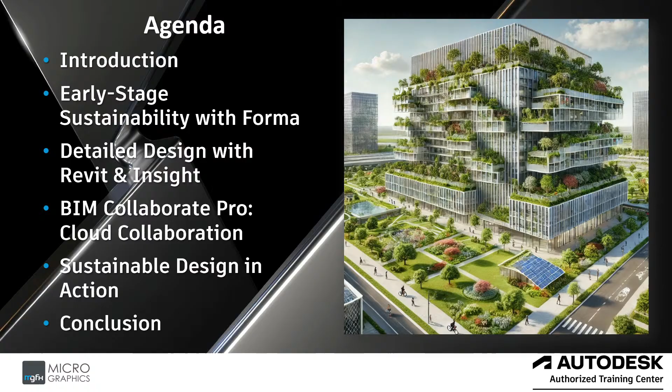On the introduction, whether you're an architect, BIM coordinator, or sustainability consultant, we all feel the pressure of tighter timelines, stricter sustainability targets, and complex multidisciplinary teams. In this session, we'll explore how the Autodesk AEC collection empowers smarter design through real-time collaboration, early insights, and powerful analytics, all within one ecosystem.

So the world is changing, right? Let's face the facts. The days of sketching by hand, communicating via emails and in-person meetings, printing documentation, making hand sketch corrections are all in the past. With rapid urbanization, climate urgency, and growing client expectations demanding a new approach to design, how do we keep up with this? We need smarter and faster and greener designs.

Today's architectural projects must be efficient, environmentally friendly or responsible, and highly collaborative. Teams need alignment. We have disconnected workflows, hand sketches being scanned and emailed or sent by post, and this is all within siloed data. Printing papers increases the risk of delays, errors, and sustainability blind spots.

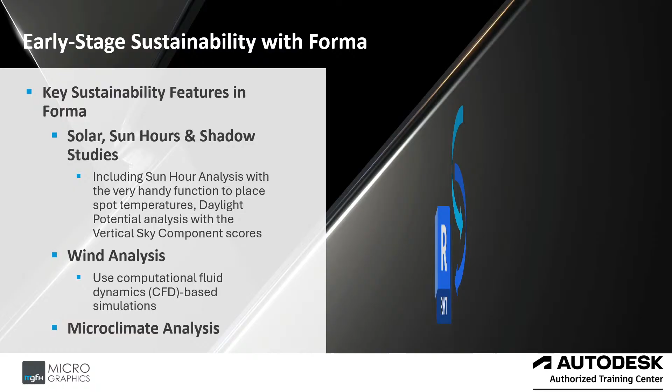Sustainability and environmental analysis with Forma. The key sustainability features in Forma would include solar, sun hours, and shadow studies. Looking at the sun hour analysis, for example, with the very handy function to place spot temperatures. Daylight potential analysis with the vertical sky component scores, giving insight to how much sunlight reaches the facades from the sky, and shadow studies. An all-encompassing solar study can be generated to optimize your building's orientation, and identify optimal facade designs for natural lighting and energy efficiency.

The wind analysis uses computational fluid dynamics, CFD, based simulations to study wind behavior around buildings. Optimize the site and massing to improve ventilation and reduce wind turbulence. Assess the effects of wind on the site. View the impact at certain heights and angles or by importance. With additional statistics, you can view the ground and or roof conditions for comfort level and the wind direction in height or with importance to the structure and the surrounding area. This is an invaluable tool to optimize sustainable and environmentally friendly designs.

The microclimate analysis in Autodesk Forma enables designers and planners to evaluate the thermal comfort of outdoor spaces early in the design process.

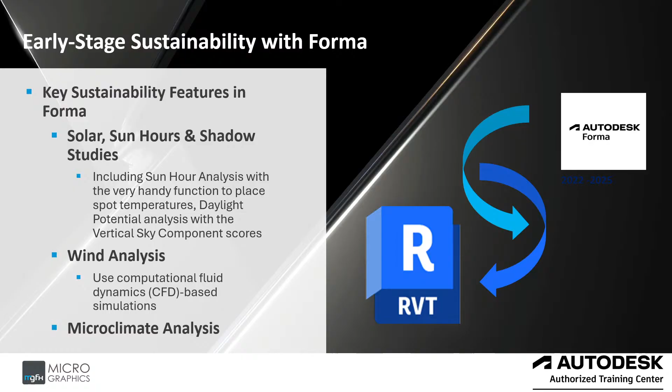Taking a look at sun hours, this is how one would run this analysis within Forma. Select your dates by month and day, allowing you to look throughout the year at the sun hours and the effects of the sun on your facades, roof, and ground conditions. We'd run an analysis.

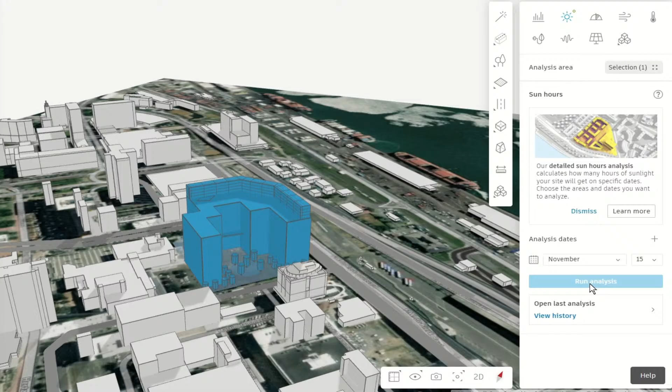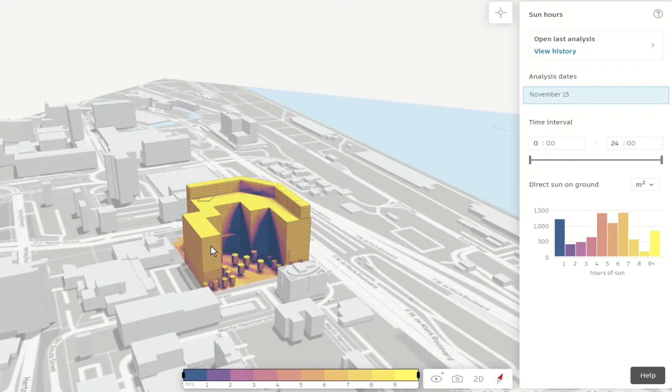Okay, let's see what the results are. This is within Cape Town. We chose a specific day, and then you have a time interval that you can select, from what time to what time, and then the direct sun on ground in meters squared. You can inspect how many hours of sun you get at specific areas within your building or around your building.

Then we have the handy inspect tool, which gives you the opportunity to see how many hours there are based on specific points on your building.

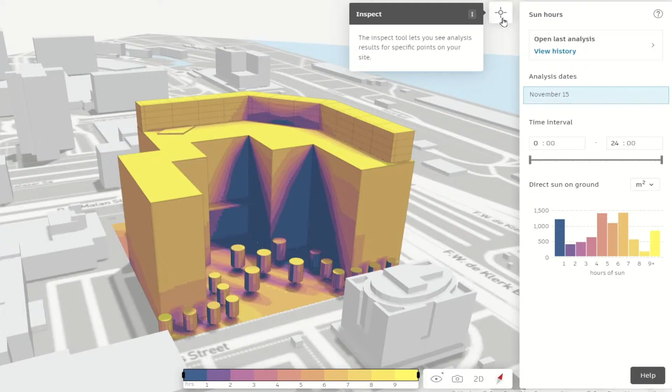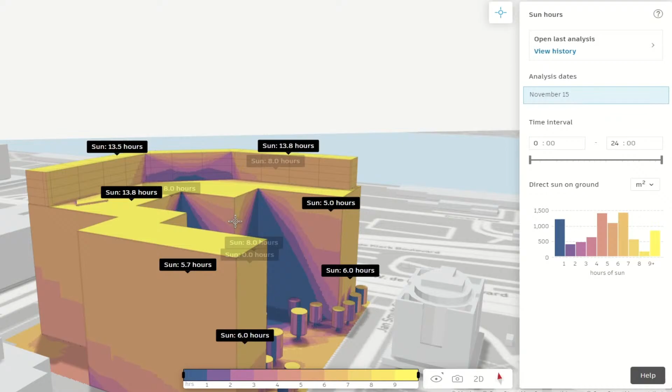Seeing that there are certain areas that get no sunlight during specific times of the day, one could make design iterations to allow for natural sunlight, reducing the need for artificial lighting, considering that there are indoor spaces that need to be well lit.

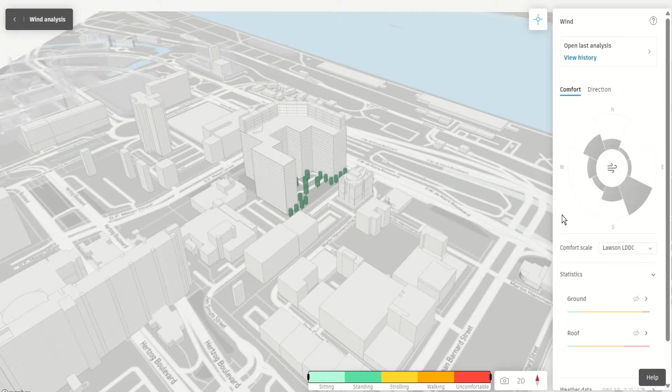Then we have our wind analysis. You have your comfort levels and the direction that the wind comes from, with different comfort scales, as well as your ground temperatures and your roof temperatures.

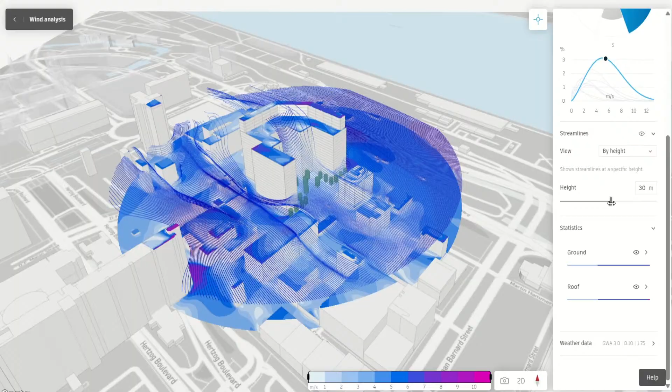Considering a southeast wind, which is quite common in the Western Cape, especially Cape Town, you can view it by height, by importance, or by variation, and see how it would impact the different levels of your structure and what kind of wind strength one can expect. This is based on local weather data from Cape Town.

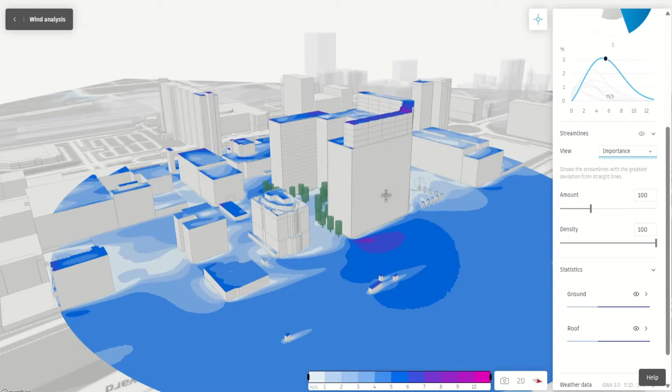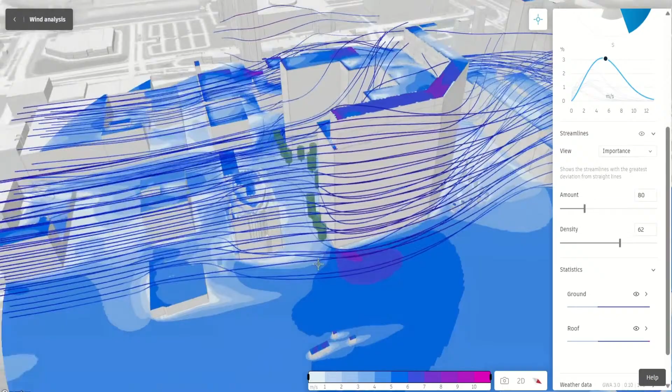That's for visual effect, so you can see the impact visually. This can be shared with all team members via your Autodesk Construction Cloud, or you can export the data and share it with them as a CSV file.

Then we have the microclimate analysis. Overall, this helps you design more comfortable, sustainable, and climate-resilient urban environments with data-driven insights into thermal performance. The microclimate is a combination of air temperature, sun hours, and wind.

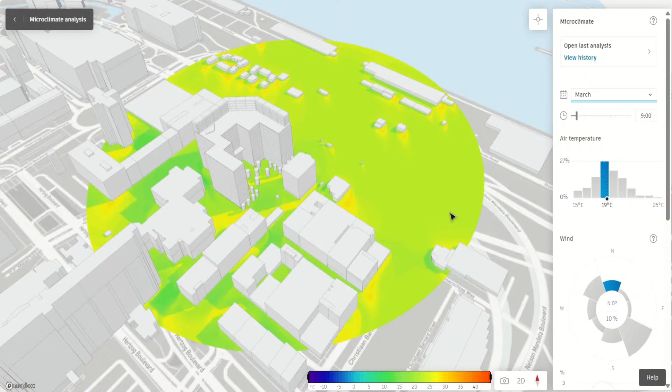Choose the time of day and month, and see the interaction surrounding your structure, understanding what the comfort levels are. You can view all the statistics and also confirm the Copernicus ERA5 data source where the information comes from regarding your site.

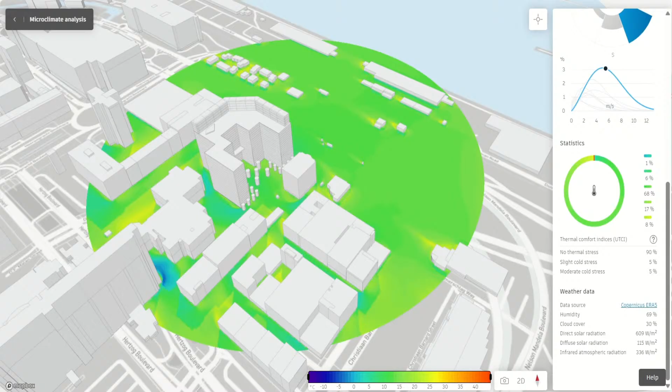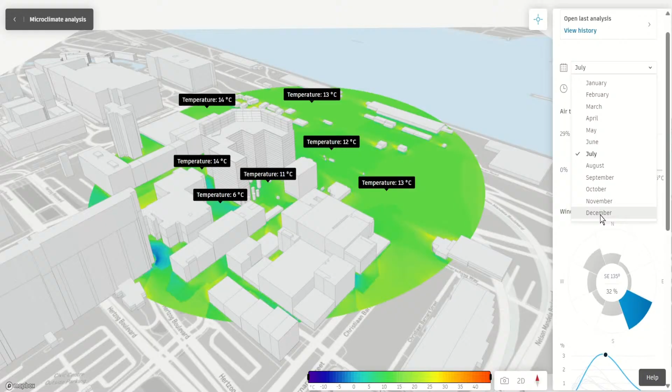You can use the handy inspect tool to get a clear indication of what temperatures would be like, this would be in winter in Cape Town, maybe mid-summer. It would be a good idea to also know what kind of temperatures to expect, and how much mechanical ventilation, air conditioning, and ductwork will be required for comfortable, livable conditions.

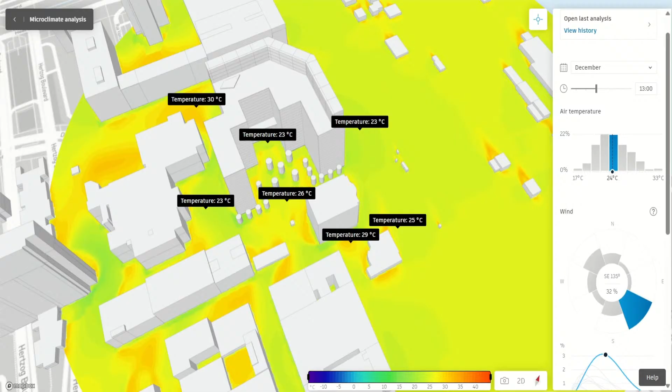So why start in Forma before designing? Understand the site first: analyze the wind, the sun, the shadows, and the microclimate before sketching a design. Smarter orientation and placement shapes your building to maximize comfort and livability. Informed decisions early let you compare scenarios and avoid costly rework later. From vision to viability, early insights guide sustainable, people-centered design.

As an overview of Forma, you can create your own site, and there's a board where you can compare things and collaboratively work with others. It's a whiteboard space.

Here is your projects, the homepage of Forma, the hubs that you've joined, companies that you work with, and your designs that have been created, your proposals. With Forma you have your site to design, and the board where everybody can talk and share information and insights, and compare your different analyses.

Here you can add your members and see who is part of this project. There are all the different types of analyses one could do, from noise to solar to embodied carbon to shadow studies. You can also add additional extensions for more analysis types. I, for example, have a parking calculator to create parking areas, aerial map information, and more site-driven information.

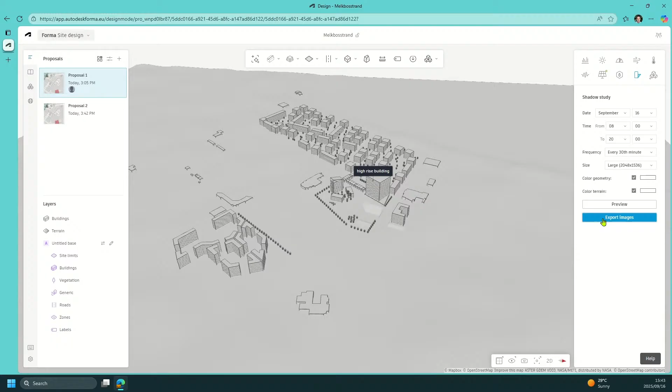Embodied carbon, and also you can go learn more about the embodied carbon if this is something that you would like to analyze additionally. You can decide what within the model you would like to analyze with regards to the envelope of the structure, the entire structure, the structural elements, interior, or the MEP systems. Then you can run an analysis with regards to the carbon footprint.

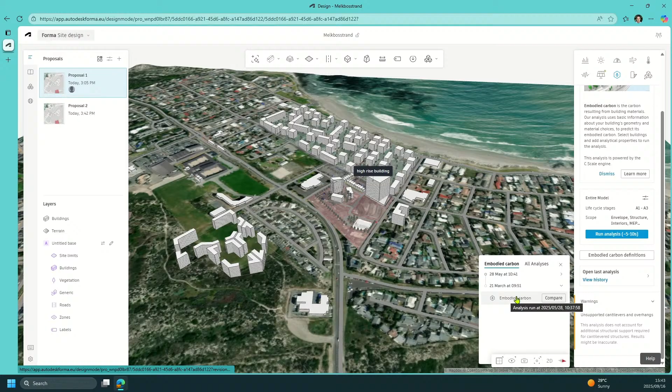So I previously ran one, so I'll compare it just to show what it looks like. On the top left, you'll see it says Forma compare. You're able to compare proposals and then different analyses with each other. You can also view them side by side.

So there, for example, we have our solar energy analysis and our carbon insights on the left. By right-clicking, you can add more views, either split the view horizontally or vertically.

So here we now have the sun, wind, microclimate, and solar energies to compare them with each other to see what the effect would be.

So that would be my Revit model that I imported, and I can see how comfortable it would be. On a certain day of the year, the 10th of September, I would have 9.5 hours of sunlight on there. I would accumulate 1,504 kilowatt hours per square meter if I had solar panels on my roof, what the wind conditions would be like, and what the temperatures would be like.

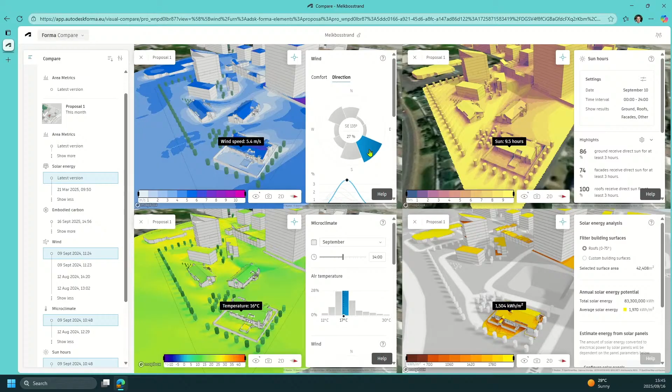Knowing what the conditions are like, you can also determine which space you would like to have where. Do you want a sunroom for the house? Do you want a braai area? You can determine what needs to be placed where for best orientation. Maybe tilting the building ever so slightly, I might get more sun hours for more solar energy for my solar panels to generate more electricity.

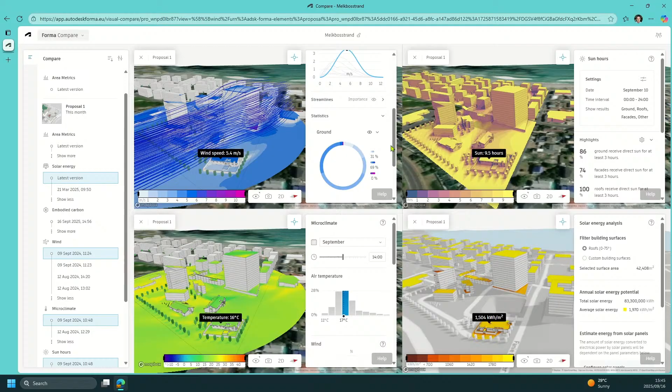Understanding the wind speeds can determine the roof pitch. So understanding your site before you start designing is ideal, knowing what the conditions are like.

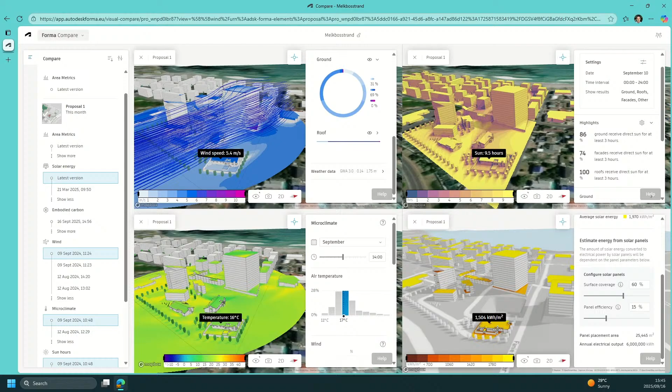So as you can see here, before I even place the first wall, you do have the option to do just a generic mass within Forma. So even if it's just a square block, or if you want it based on a house design or a commercial structure, depending on your needs, you are able to create massing elements in here.

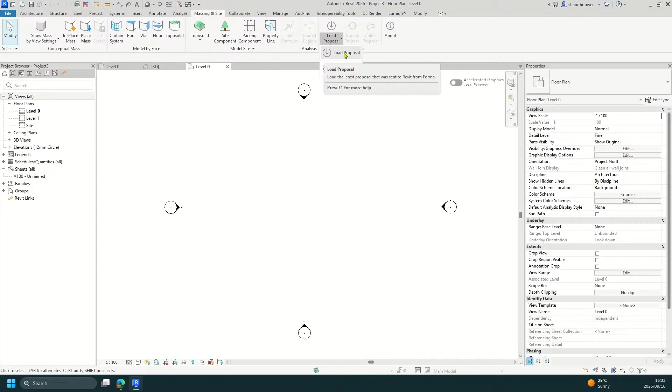And once your mass has been created, it can be sent to Revit, and within the Massing and Site tab, you will find the Forma panel where you can load the proposal, which is quite ideal if you would like to have a generic understanding of your contours of your site, how it falls, what it looks like.

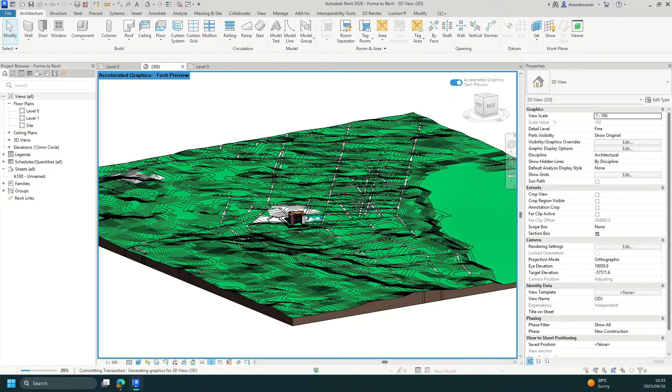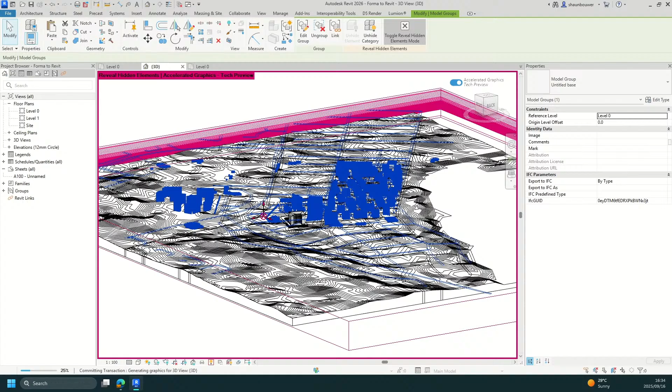Now you understand the conditions of the site with regards to all the different analyses that were run. You have your structure available. When you import the model, I've hidden all the other ones that I am not using, so the surrounding structures, but then you can start making design iterations. So the massing elements that you bring in from Forma can be converted in Revit to become walls, floors, roofs, etc.

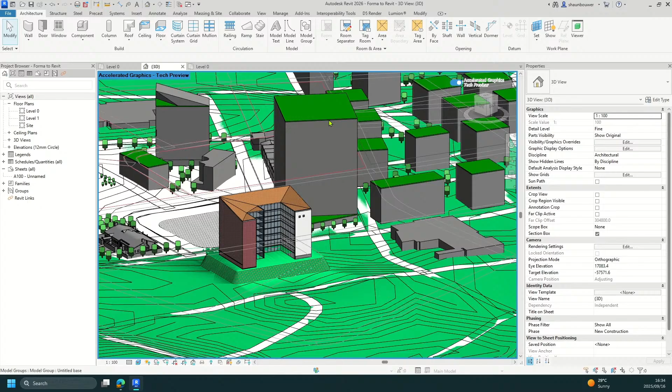So here, for example, I can convert the walls. I did this before the webinar just to show what one could do. I converted them into glazing elements, and I tilted the pitch of the roof.

Once you've done your design iteration, send it back to Forma, rerun the analyses, and see if your design iteration made a difference with regards to all the different analyses that are available.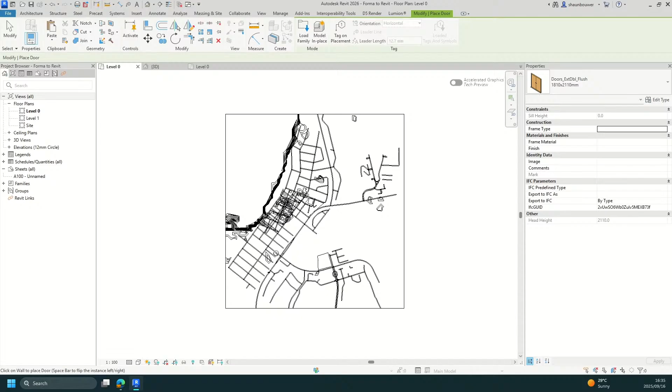So I've hidden the level lines, but there are levels that are created and given to you within Forma. Okay, so that's my site, my topo solid. I can also go and crop just that area out if I do not need all of the other information. As you can see, it becomes a roof element, and the roof element can be altered.

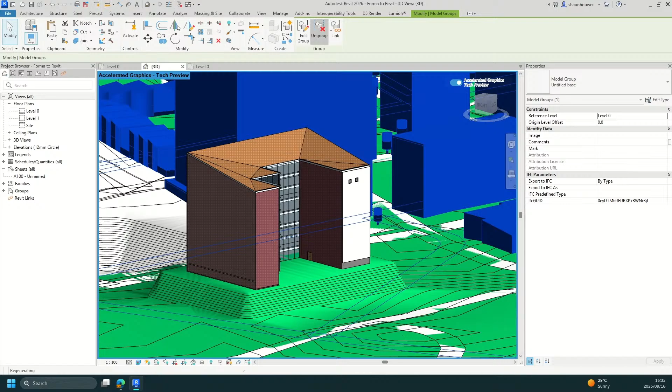So there you have it, it comes in as a wall by Forma, and you can convert that into your own elements, making it usable Revit elements.

So it's a fairly big site that I brought in, which is why my computer struggles to keep up, but it's quite ideal how quickly one could make adjustments in Forma, from Forma to Revit.

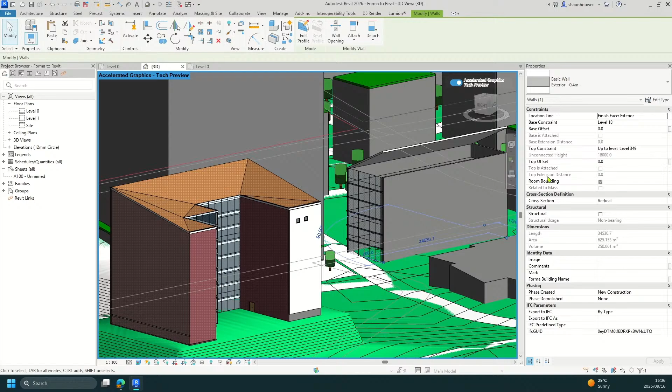Alright, so from Forma to Revit for the detailed design, including the insights, Autodesk's commitment to a sustainable future. Autodesk has made sustainability a core pillar of its mission. With every software update, they continue to enhance tools to support low carbon, energy efficient, and environmentally responsible buildings.

Revit empowers architects and engineers with a wide range of built-in and extensible analysis tools that support green and high-performance design. The built-in analyses include energy modeling, lighting and solar studies, HVAC and MEP systems, structural performance and analysis, carbon analysis, electrical load calculations, routine and space utilization, just to mention a few.

Additional extensions are available via the Autodesk App Store, and Autodesk Construction Cloud integrations expand these capabilities even further, allowing for a deeper lifecycle assessment, advanced simulation, and carbon tracking. Together with the cloud collaboration and AI-driven design optimization, Autodesk Revit helps project teams align with global sustainability goals, reducing both operational and embodied carbon while designing for a net zero future.

So, detailed design in Revit. When most people think of Autodesk Revit, they immediately connect it with 3D modeling, coordination, and building information modeling, BIM. While those are its core strengths, Revit is also a robust platform for producing detailed 2D construction documentation.

Many architects and engineers assume that AutoCAD or other drafting tools are still needed for detailed drawings, but Revit offers a complete set of tools to create elevations, sections, wall details, stair details, floor assemblies, and more, all within a coordinated BIM environment. So we will look at the different types of views that are available in Revit, the functions that support detailing, and how Revit can be leveraged to produce documentation suitable for municipal approval and construction teams on site.

So Revit for detailed design, the key benefits when detailing in Revit. First, why detailing in Revit matters.

Detailing is the bridge between design intent and construction execution. Without precise details, contractors and builders cannot interpret the architect's or engineer's vision. Revit brings detailing into the same environment as the building model, eliminating the risk of disconnected CAD files or manual rework.

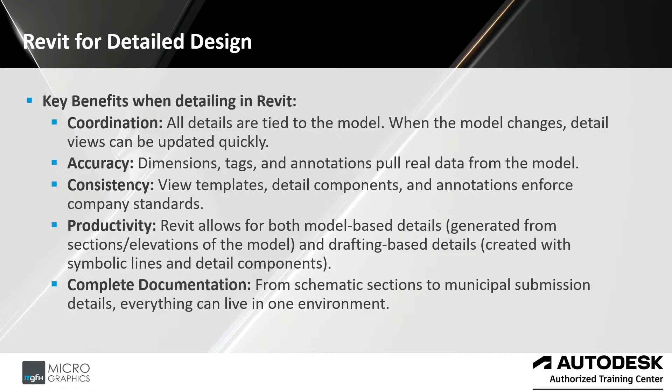So the different types of detailing views that are available within Revit include floor plans. These are horizontal cut views through buildings. The level of detail would be coarse to fine, and use cases include general layouts, floor assemblies, finishes, fire ratings.

Ceiling plans are views from above or from below looking up towards the ceiling, medium to fine detail, this would be for MEP coordination, ceiling finishes, lighting layouts, and so on. Elevations, vertical projection views, medium to fine level of detail, exterior finishes, facade details, and wall build-ups. Additionally, you can also have internal elevations.

Sections cut through slices of the building with fine detail. This includes wall sections, stair sections, and foundation details, just to mention a few types.

Callouts are a zoomed-in detail of larger views, with fine detail for window details, wall junctions, or roof connections.

Drafting views are independent 2D detailed drawings with a fine level of detail, such as typical details, manufacturer details, or standard notes.

Detail views are enlarged, detail-rich callouts at a fine level of detail, such as floor to wall junctions, waterproofing, and insulation details.

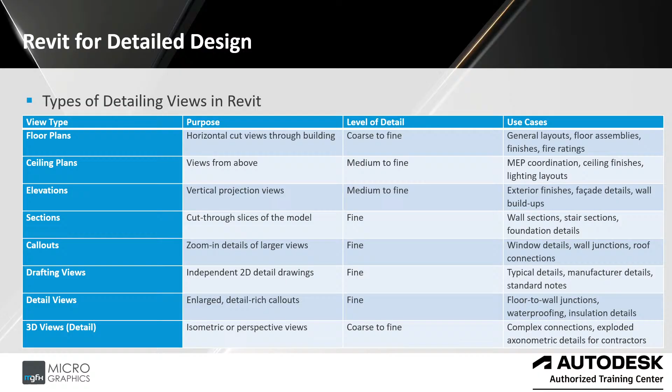Functions and tools for detailing in Revit. While views are important, the real power lies in the detailing tools that Revit provides.

The tools include detail components, line work tools, filled regions (also known as hatch patterns), detail lines, tags and annotations, keynotes and keynote legends, detail groups, and drafting views, which is similar to AutoCAD in Revit. You have the same modification and draw tools as you have within AutoCAD 2D annotation and drafting, view templates, and filters for detailing in Revit.

When you detail in Revit, you can add annotations, dimensions, 3D multi-leaders, and generic text. They can all be placed within 3D.

If you make a change to an element with regards to its material or size, a tag can automatically update on all the views.

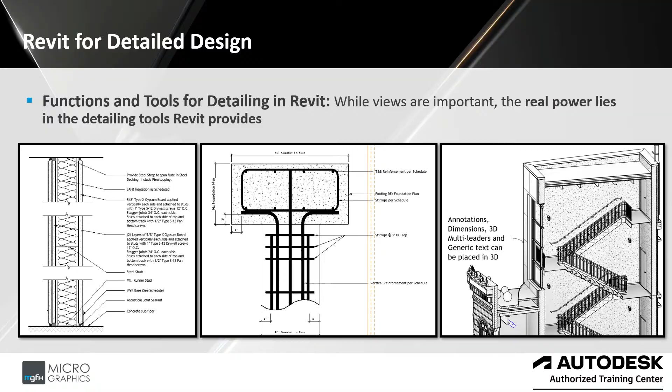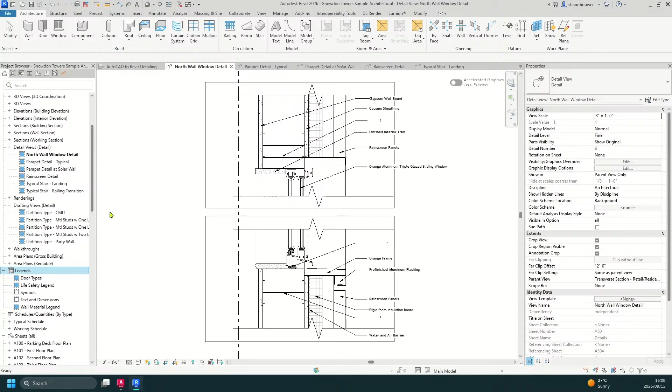So looking at an example of using this within Revit, here we have our different views in our project browser: floor plans to 3D views, elevations, sections, detail views, renderings, drafting views, walkthroughs, area plans, legends, schedules, a multitude of different view types. You can also create your own types.

These are typical examples of cut-through 3D geometry to have as detailed views, which you would annotate or tag different types of elements. Then you have the AutoCAD to Revit drafting views.

You could import or link AutoCAD files, or you're able to draw them in Revit from scratch, creating all the different types. If I take an example, here is my drawing in AutoCAD.

We have our line tool, our drawing tools, and our modification tools. Those are also available in Revit, same with the annotations.

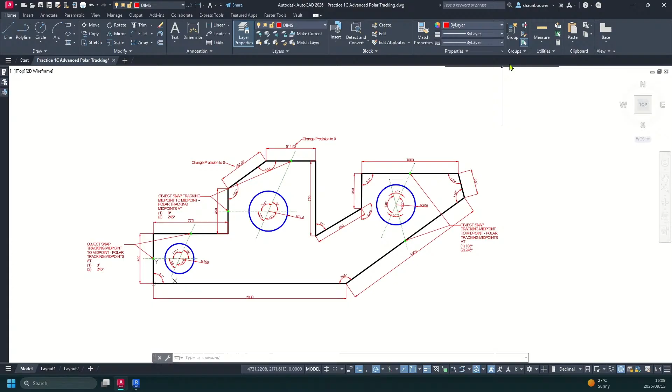So how would one do it? Go to your View tab, select the drafting view. This is to create those 2D detailing elements with detailed lines, detailed regions, components, insulation, and more.

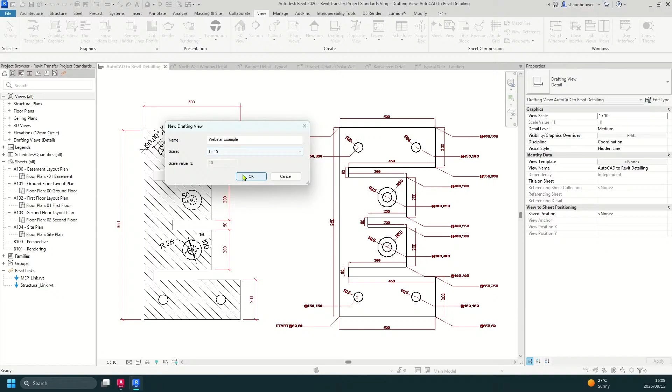Give it a name, I'll just call it a webinar example. Select your scale that you want to work with, and draw on. This can be altered after. You can link a CAD file or start without a CAD drawing.

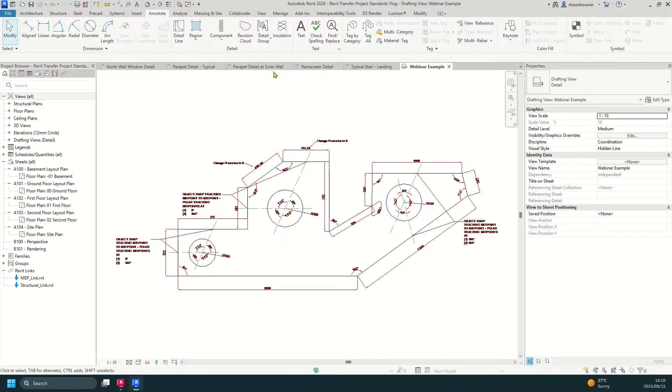Your AutoCAD is available inside Revit. On the Annotate tab, you will find all the 2D elements that one could use within Revit, including symbols, keynotes, tags, text, multi-leaders, and detailed lines and dimensioning.

For a quick sketch, if it is a PDF, vector PDF, or a CAD file, you can quickly just trace it with the pickline tool. In a matter of seconds, you have your drawing drafted with Revit elements.

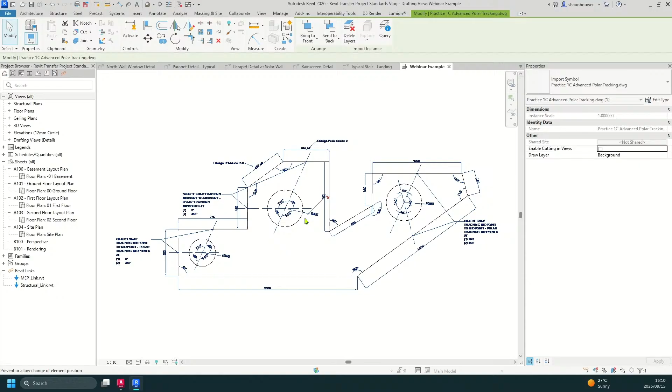Then you're able to have a filled region or a hatch pattern for more visual or graphic understanding of what the element is, that it's been cut through, or however you'd like to communicate your work.

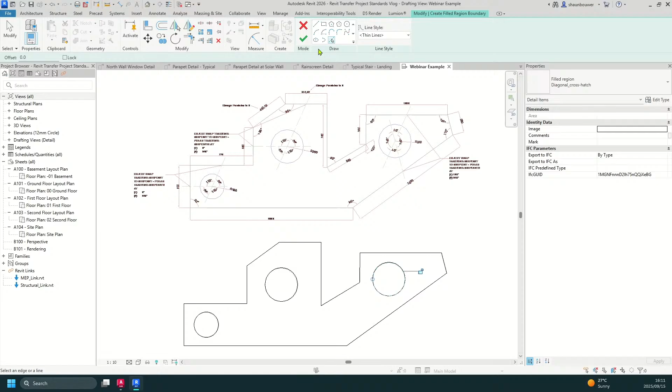These hatch patterns, you also have the same hatch patterns available as you have in AutoCAD. If you edit the type of the filled region, you will find the full pattern. Here you can see all the preloaded ones within your template.

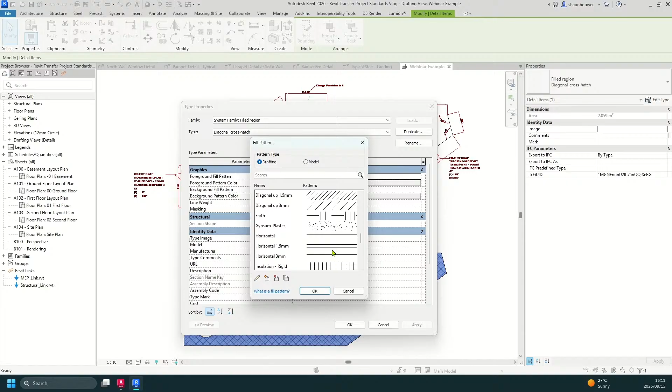You can create new ones or load other ones if you have them already available, but then you also have 3D model fill patterns. You can give it a color as well to define the information more clearly visually.

Then once the lines have been done and the hatching has been done, you also have the opportunity to dimension this. You have the same dimension tools as you have in AutoCAD: aligned, linear, angular, radial, diameter, arc length, spot elevation, spot coordinates, and spot slope, which can also be used in 3D.

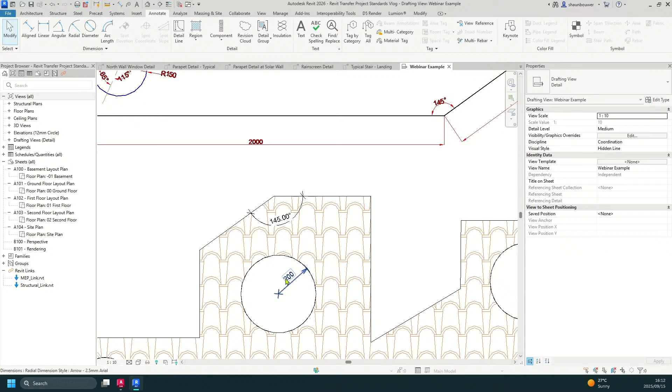You can add a prefix and suffix, change the dimension style for different font or size, and quickly have everything that you need for your detailing.

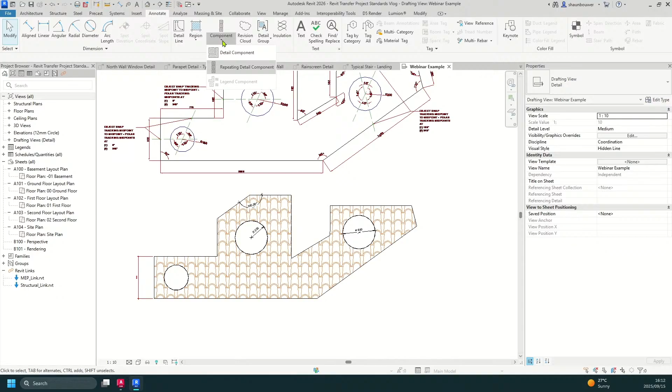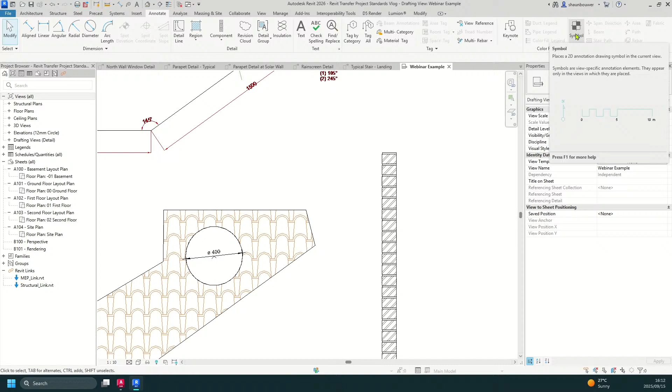Then there are great tools such as the detail components. Instead of drawing all of this with polylines or rectangles and then hatching them, with a single click you can place an entire wall ready for a foundation detail or wall detail.

So apart from the detailing capabilities in 2D and 3D, Revit also offers analysis tools, simulation tools, scheduling, legends, and more catered to architecture, structural, mechanical, electrical engineering, HVAC and plumbing, and other disciplines such as interior design or kitchen design.

Some examples include solar, lighting, and sun studies within Revit.

Choosing your site on the global internet mapping service, aligning that with your coordinate systems such as the Hartebeesthoek in South Africa, and choosing the correct weather system closest to your site increases the accuracy of your solar and sun studies.

For internal daylight factors with regards to SANS 10400 XA calculations and external sun penetration on the facades, which aid solar panels to generate operational energy for your buildings. All this can be done within Revit.

Whether you're designing a home, office, or large commercial building, understanding how light interacts with your spaces is essential for creating energy efficient and sustainable design.

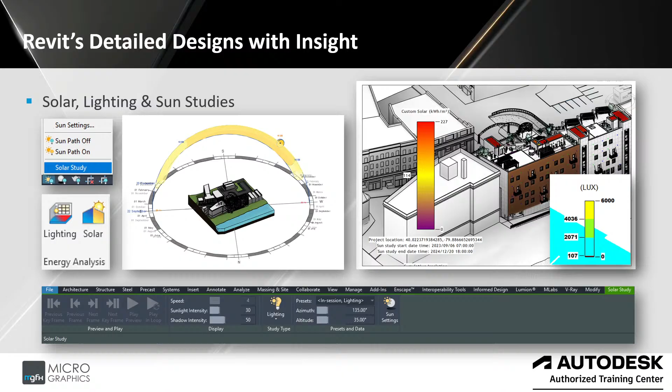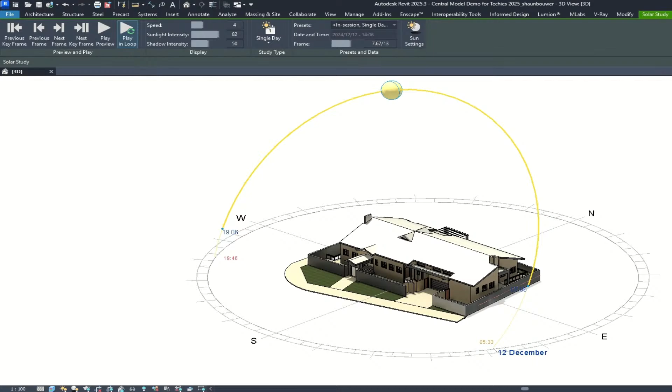When you run a solar study, you have your sun settings. You can select a single day or a multi-day study type. Your specific site data and geolocation are set, whether you're acquiring the data from Civil 3D coordinates or placing it in Revit.

These are based on real-world accurate weather data, so you can see how the sun and shadows interact with your building at specific times of the day. This was an example of 12th December in Cape Town from 5:33 a.m. till 19:46 p.m.

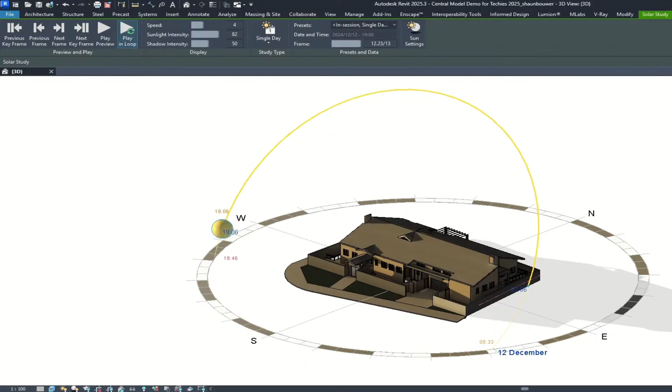Additional to the sun study via the graphics panel, Insight in Revit includes tools to analyze solar exposure and shading effects, helping architects optimize the building's layout and orientation for solar gain or shading as needed.

By performing the solar studies, designers can determine the ideal window placement or shading strategies that help control heat gain in warmer climates and capture solar warmth in cooler areas.

This analysis aids in designing facades and shading elements that effectively manage sunlight, improving energy performance and thermal comfort. Then the Insight Lighting Analysis tool is also available to quantify light levels.

This tool evaluates lux levels, measuring how much natural light a space receives. For sustainable design, achieving adequate daylight without glare is key.

The lighting analysis, especially in Autodesk Revit, is a simulation process that helps designers evaluate how natural and artificial light behaves in their design models.

The goal is to measure the light levels inside spaces, helping architects and engineers optimize building performance and improve the occupant's comfort.

So once the external sun study has been done, open an internal perspective and see how the sun would light up the rooms and interact with your space, to determine the need for artificial lights and understand the demand for operational energy.

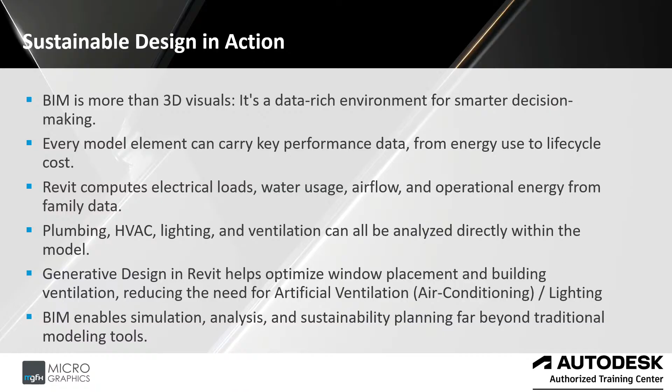So how do we meet the demands of sustainability, speed, and team alignment? This is where the Autodesk AEC collection becomes essential. Rather than a single app trying to do everything, it offers an integrated ecosystem of powerful tools that work together - from conceptual analysis in Forma, detailed design in Revit, and performance evaluations with Insight, to full collaboration and coordination using BIM Collaborate Pro. Everything is connected and purpose-built for AEC professionals.

The result? Smarter decisions, faster delivery, and more sustainable outcomes across the project's lifecycle.

So Revit is for model smarter, design better, document efficiently. Forma analyzes the environmental impacts from the earliest stages. Insight offers real-time energy and performance simulation tools. Civil 3D lets you design the site and infrastructure with precision. BIM Collaborate Pro provides cloud collaboration with integrated issue tracking and clash detection. Autodesk Docs gives you centralized document management for every team member.

So in conclusion, repetition is key, right? BIM empowers informed, eco-conscious decisions. We've seen how BIM isn't just about 3D models - it's about making smarter, sustainable choices grounded in data and performance insights.

Early integration leads to greater impact. Tools like Revit and Insight are most powerful when used early in the design process, when decisions carry the most weight for long-term sustainability.